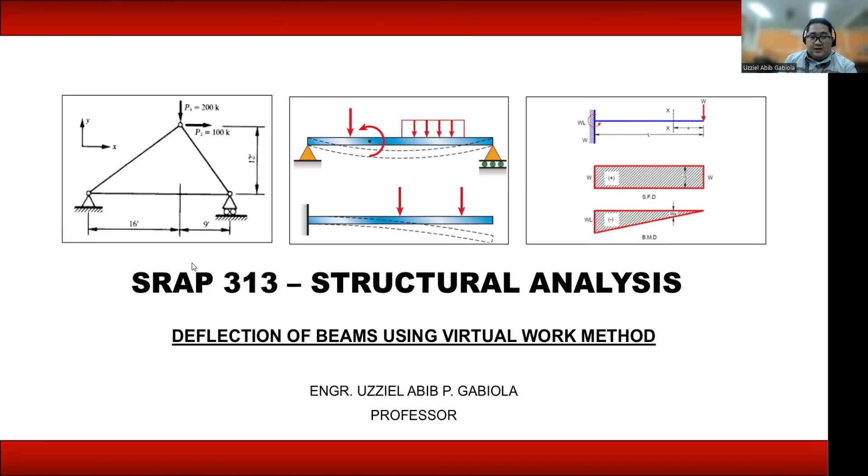For virtual work, I will not go deep into the derivation on how the formulation came to be, because it will just bore you, and eventually you won't apply it in the solution anyway, since the formula is already established, which is this.

Since we are utilizing the virtual work method or energy method, the conservation of energy still exists, which is that our external work is equal to our internal work.

So the main formula we are concerned with for this method in applying the virtual work method for beams is this. As you can see, it is the same when we are looking for the deflection or displacement of our point. The formula is given as the integral of MX, capital M times small m, over EI dx, and for slope it is the same.

So that is the beauty of this method. You are using the same formula, you will only differ in the applied virtual load.

Because if we are talking about displacement, we are talking about translation with respect to our x and y axis. So our consideration is a load, whether applied up or down, at the point we are interested in.

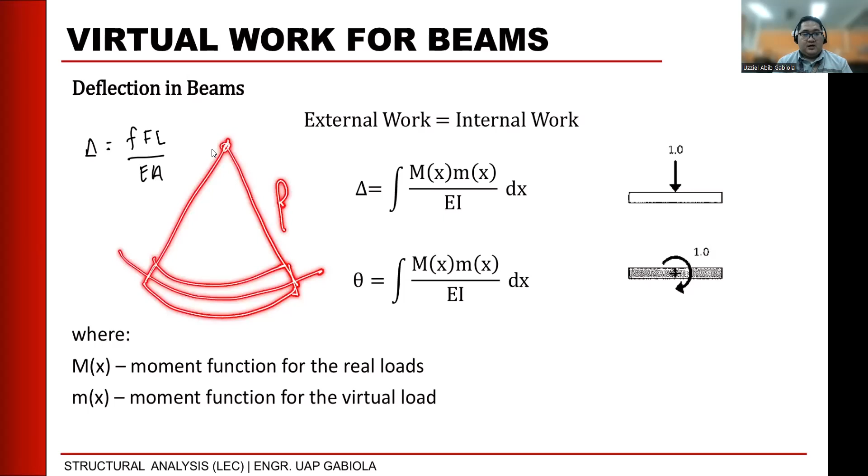That discussion arrives at the equation where the differential equation is the second derivative of displacement equals M over EI. This is the value we get from it.

Here is what happens, this is the curvature equation. If we integrate it once, we get dv over dx. This is the same as in the double integration method, where we integrate over the length L.

So we get ML over EI. This dv over dx is our slope in the double integration method. And if we integrate once more, it becomes v, which is our deflection, giving us ML squared over EI, equal to our deformation.

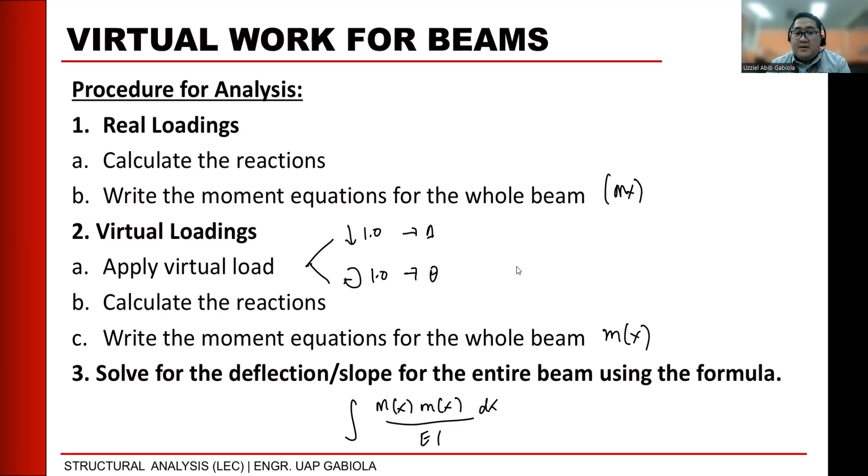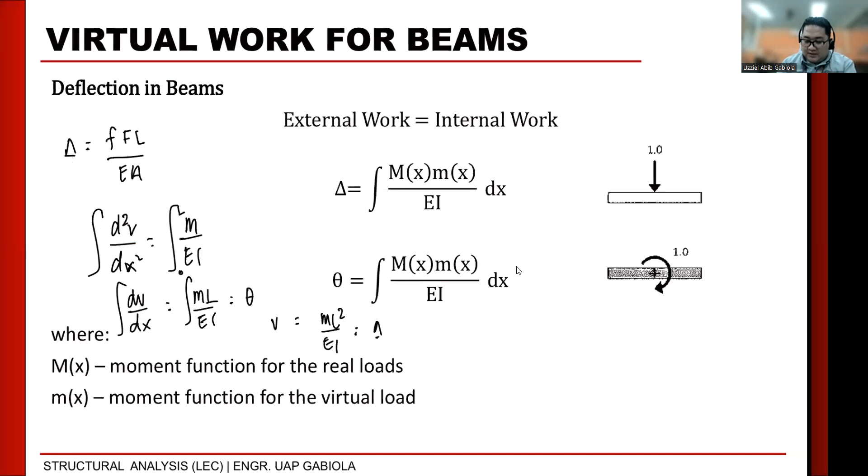Before we go to the example, let's show how the units work. For example, for theta: according to the previous slide, theta becomes ML over EI.

The moment is usually in kilonewton meter, the length usually in meter, E is in gigapascal - like we used before, kilonewton per mm squared - and the inertia is in mm to the fourth. You'll notice the kilonewton cancels, and the two mm squared cancel, leaving meter squared on top.

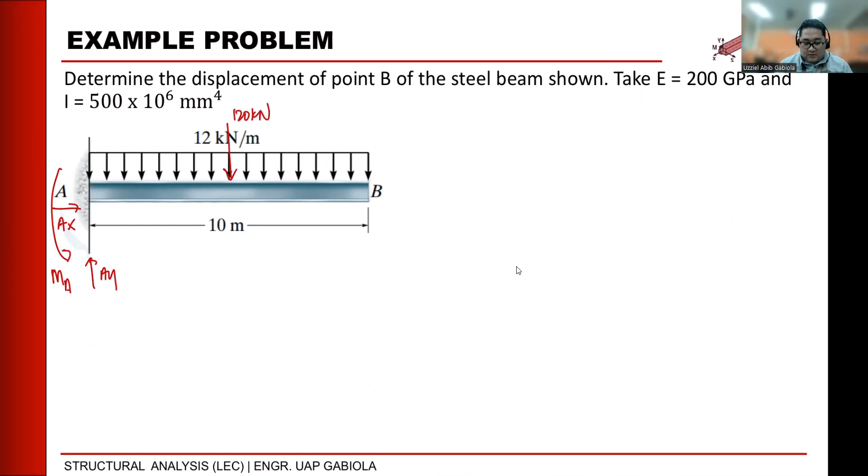We have a uniformly distributed load, and we know that it acts on the center of the beam. So 12 times 10 gives us 120 kilonewton. Solving, AY becomes 120 kilonewton, and AX will be 0.

For MA, we take the summation of moment at A, taking counterclockwise as positive. So 120 times 5 equals MA, or MA equals 120 times 5, which is 600. Okay, let's pause here for a while.

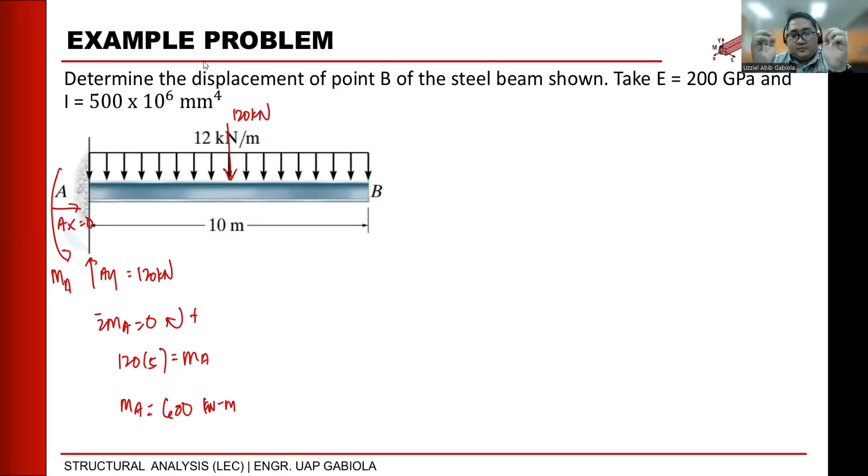Okay, so this is our moment, 600 kilonewton meter. So these are our support reactions, complete na. Next job natin is to identify our moment equation. Kailangan strategic tayo sa pag-identify kung alin yung magiging origin natin.

So kung kayo yung papipiliin, tapos papahanapin kayo ng moment equation, which side yung i-consider ninyo? Okay, halimbawa naglagay ka ng cut. Since uniform lang naman yung load natin, safe to assume na one section lang yung kailangan natin. So pag nag-cut ka ng section, aling side yung i-consider mo? Ang mas convenient, syempre, yung right side.

Kasi lesser ang loadings natin, uniformly distributed load lang. Pag yung left side, meron kang mga forces na to, so medyo magiging tedious yung paggawa mo ng moment equation kapag yung left side yung ginamit mo. So pwede natin gamitin yung right side, okay?

Ngayon, ang kaibahan, pag consider mo yung right side, pwedeng doon muna gawin yung reference ng x mo. Ibig sabihin, pwedeng ito yung maging positive yung origin mo. So ito ang zero mo, yung point B ang zero mo, and then magiging from there yung mismong value ng x mo, habang nag-a-adjust ka doon.

So pag nag-cut ka ng section, okay, ito ngayon yung magiging beam natin. And then this is x. Di ba dati ang ginagawa natin, pag sa right side, magiging siyang 10 minus x?

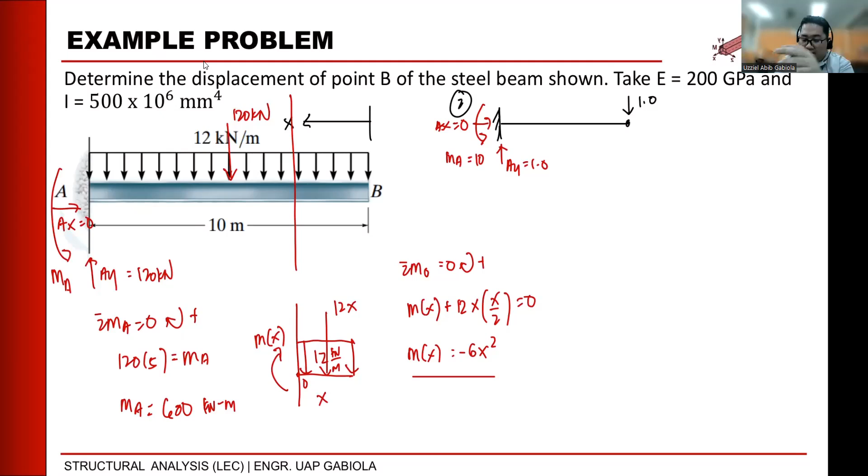Okay, and then after nga makuha na natin support reaction, isusulat na ulit natin yung moment equation for the whole beam. Pero ang kailangan natin gawin, kung anong ginawa nating procedure doon sa real load, ganun din yung gagawin natin doon sa kabila. What do I mean? Dito, kailangan mo na ng moment equation. Pag nag-cut ka ng section, kung doon sa real load right side yung kinonsider mo, dito sa virtual load, right side din ang i-consider mo. Or kung ginawa mong origin itong free end natin, dun pa rin yung magiging origin natin.

Para later pag nag-substitute tayo ng values doon sa integral equation natin, hindi tayo magkakaroon ng dalawang unknown na variable. Same variable lang yung gagamitin natin. Okay, so dito, again, taking a cut.

Cut doon sa section natin na yon. So mangyayari, ito yung magiging cut section natin. This is 1.0, so same cut tayo, so x lang din yan. Kailangan natin is yung small moment na x.

So, pag summation of moment at point O is equals to 0, taking clockwise as positive, so we have mx plus 1 times x is equals to 0, or small mx is equals to negative x. Okay, so ito naman yung ating moment equation for our virtual load.

Okay, next, punta na tayo sa third step natin, which is yung gagamitin na natin yung formula is equals to mx, small mx, dx over EI.

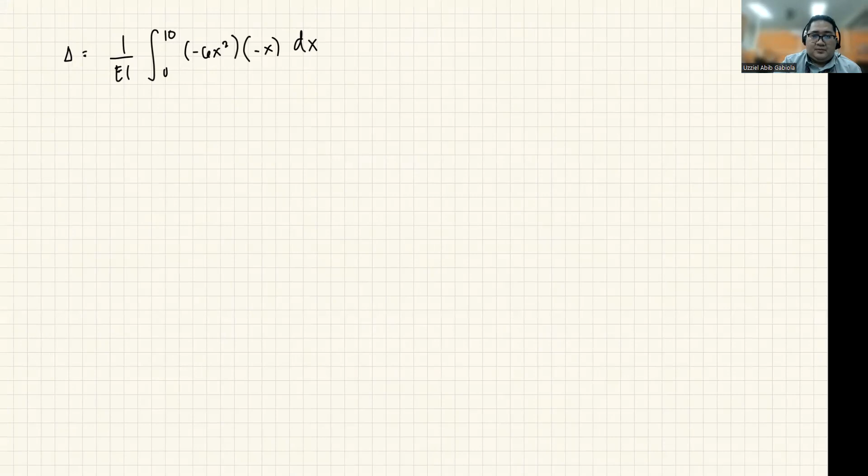Share natin yung calculator. Okay, so ito yung calculator natin. So integral sign natin, type lang natin negative 0.6 x squared times negative x, from 0 to 10. Equals. Yan, may nakuha tayong value, 1,500.

Okay, so yung 1,500, di ba EI yun? Yung E natin, pakita ko na lang muna dito sa calculator. Ang E natin is 200, at yung I natin is 500 times 10 to the 6. Tapos para uniform ang units, ang ginawa natin, yung ating nasa taas, minumultiply natin ng 1,000 cube. Okay, para sa displacement, so yung magiging answer is 15 mm.

So yun yung magiging deflection natin, 15 mm. Okay, so okay ba tayo doon?

Sige, balik tayo doon sa slide. Kasi straightforward nga siya, no? Pwede mong, kung medyo sanay nga kayo talaga mag-calculate niya, pwedeng sa calculator na yung solution nito, no? This is for board exam naman, ang sinasabi ko, no? Hindi doon sa exam natin.

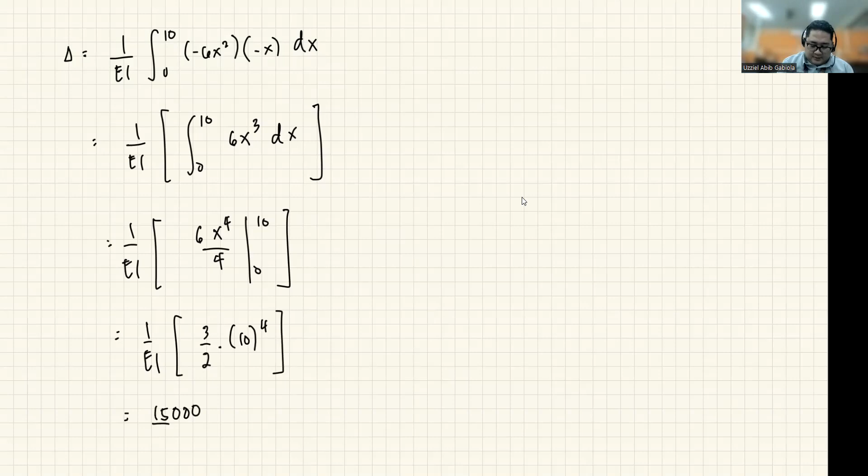Okay, so ayan, so dito kung ima-manual natin, 1 over EI, ito magiging 0 to 10, multiply that is 6x cubed dx. Okay, so 1 over EI, so magiging siyang 6x to the 4th over 4, and then 0 to 10, that will be 1 over EI. 6 over 4 is 3 halves times 10 raised to 4. Okay, so that is just 1.5 times 15,000 rather. So 15,000, okay, over EI.

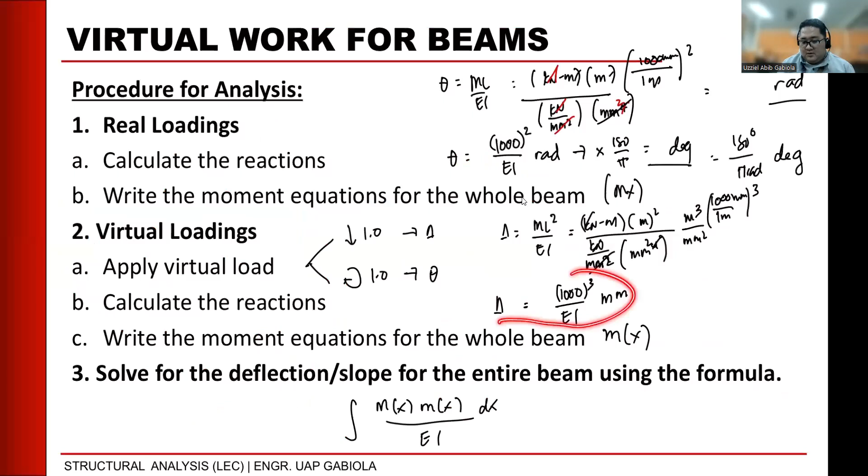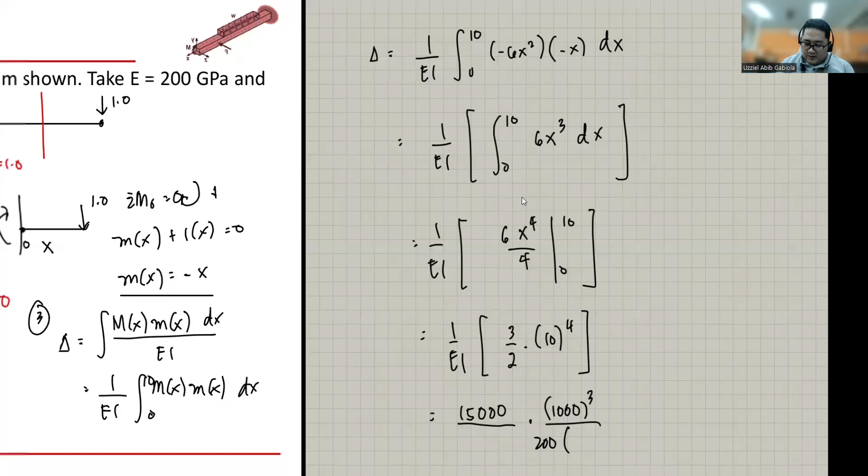Again, yung ginagawa natin kanina dito, no? Pag displacement, multiply natin ng times 1,000 cube over EI. Okay, so yung nakuha natin, so 1,000 cube over EI. So 200 times EI na, ang I natin is 500 times 10 to the 6. Okay, so pag kinalculate natin, 15,000 times 1,000 cube over 200 times 500 times 10 to the 6 should be 150 pala, no? 150 mm.

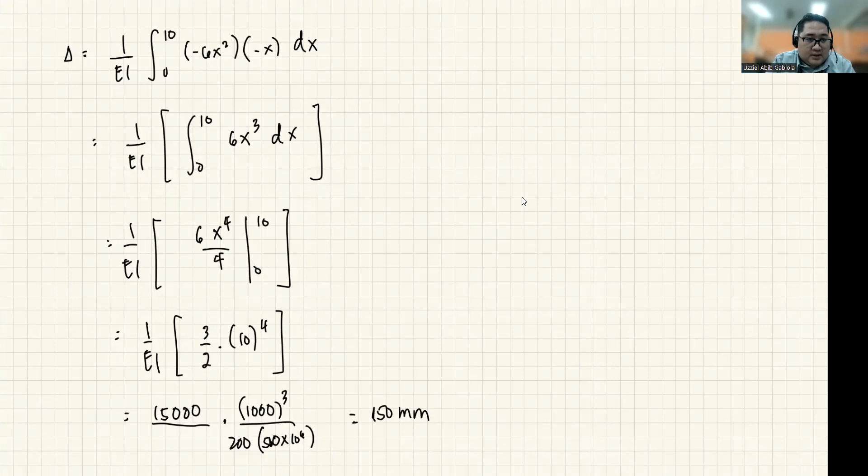Okay, so doon sa calculator ko kanina, yung limit siguro, no? Mali yung napindot kong limit. 0 to 10 points, 6 pala, no? 6x squared. Hindi, share ko lang ulit, ha?

Okay, dito. Ayan, dapat pala ang equation pala natin is 6x, ano? Bakit ba naging 0.6 to? Ayan, ayan, yan, para 15,000 yung lalabas, tapos times 1,000 cube over EI.

So 200 times 500 times 10 to the 6. Ayan, so 150 mm, that will be yung displacement at point B. Yan na yung answer natin for this first example.

Okay, so 'di ba, in a nutshell, mas mabilis siya, no? Madali siyang i-calculate, mas madaling makuha yung deflection natin. Okay, so that is for our first example. Okay, so for a while lang.

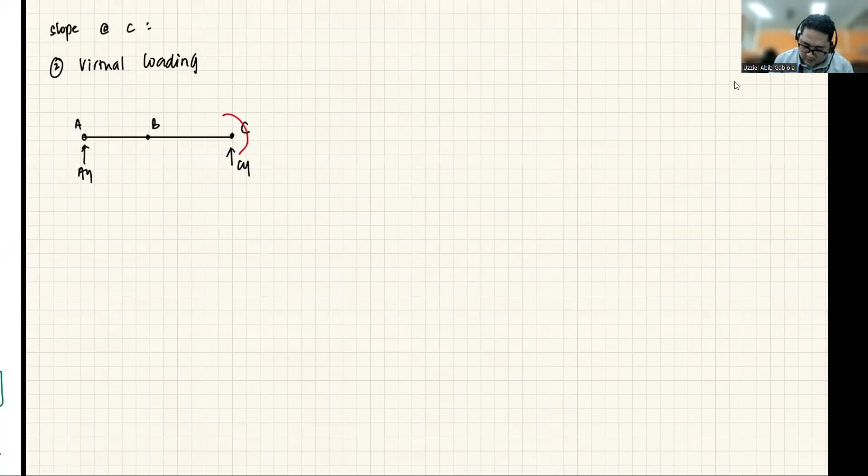Then we get the support reaction. Summation of moment at C equals 0, taking clockwise as positive. So we have AY times 2 plus 3, which is 5, plus 1 equals 0, or AY equals negative 1/5, that is 0.2. Negative means our initial assumption on the direction of AY was wrong.

So AY is 0.2 downward. Then we need to get the value of CY. Summation of forces, y equals 0. So CY equals AY, or taking moment at C: 1 times 3, so over 5, CY is 0.2.

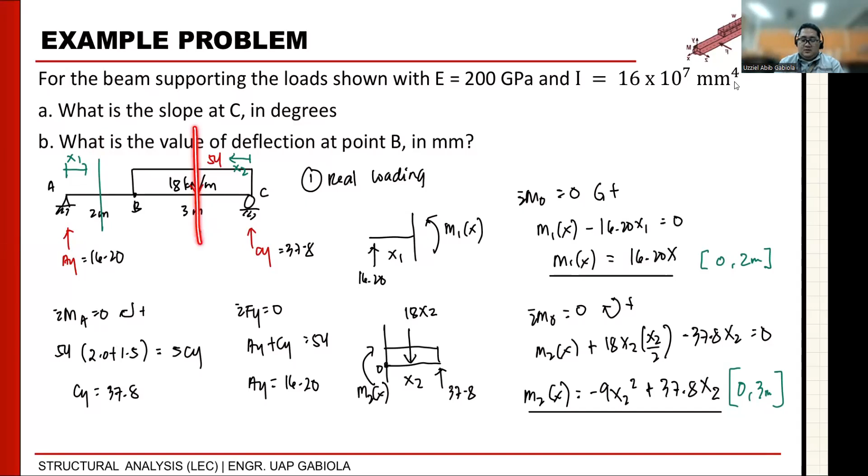So we have 0.2 times x1, and this is our moment, small m1x. Summation of moment at O equals 0, counterclockwise positive. So m1x plus 0.2x equals 0, or m1x equals negative 0.2x. That is our first moment equation.

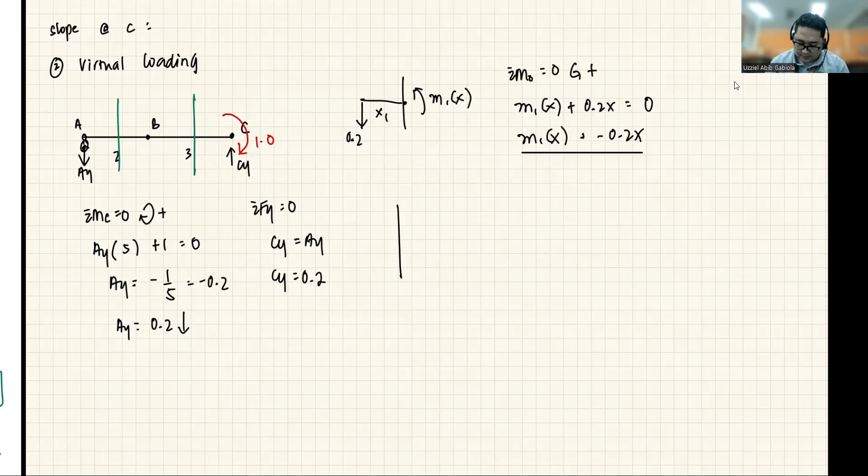Then we have the other one: 0.2, a moment of 1.0, and m2x. Summation of moment at O equals 0, taking clockwise as positive. So m2x plus 1.0 minus 0.2 times x2, our distance, equals 0, or m2x equals 0.2x2 minus 1.0. That is our second moment equation for the virtual load.

Now let's continue to step 3 and put it into our equation. To get the slope at C, we need an integral for M1x times m1x, the first segment - EI factored out since it's the same - from 0 to 2, plus the integral of M2x times m2x dx from 0 to 3.

Substituting: 1 over EI, with parentheses, M1x is 16.2x, so that is 16.2x times negative 0.2x from 0 to 2 dx, plus from 0 to 3: negative 9x squared plus 37.8x2, and 0.2x2 minus 1.0 dx.

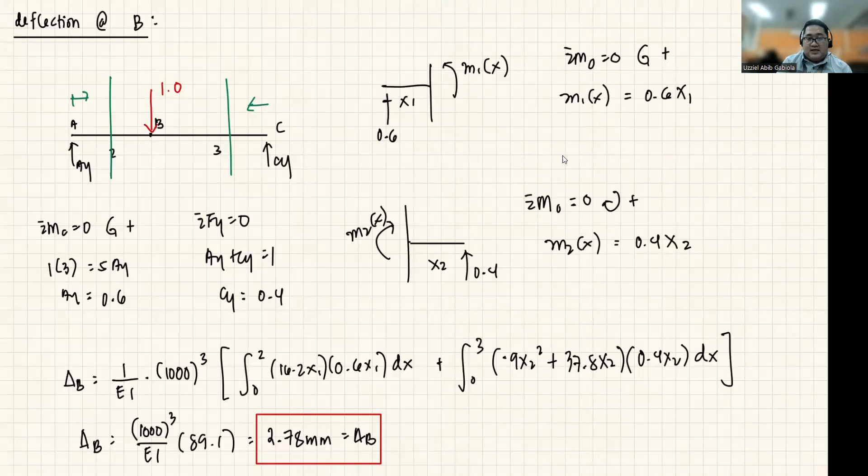Pero at least ito, parang double integration method din siya dahil kinukuha natin yung moment equations, pero diretso na sa calculus yung pag ano sa kanya.

Okay, ito yung second example natin. Kaya pa ba ng isa? Sige, let's try another one.

From the given beam below with constant value of EI, yung unit niya, 63,000 kilonewton meter squared. Compute the deflection at free end, determine the slope at the free end in radian, and slope at A in radian. Okay? Yung beam natin is a simply supported beam. Meron tayo ditong hinge, meron tayong roller, and then we have a uniformly distributed load na 20 kilonewton per meter.

So ayan. This is 15 meters. This is 6 meters.

Okay, so to solve, again, support reactions tayo. Bigyan natin ng points. This is A, B, and C. So AY, then BY, and then yung ating ECL, that is 20 times 21, that is 420. So pwedeng summation of moment at A is equals to 0, taking clockwise as positive.

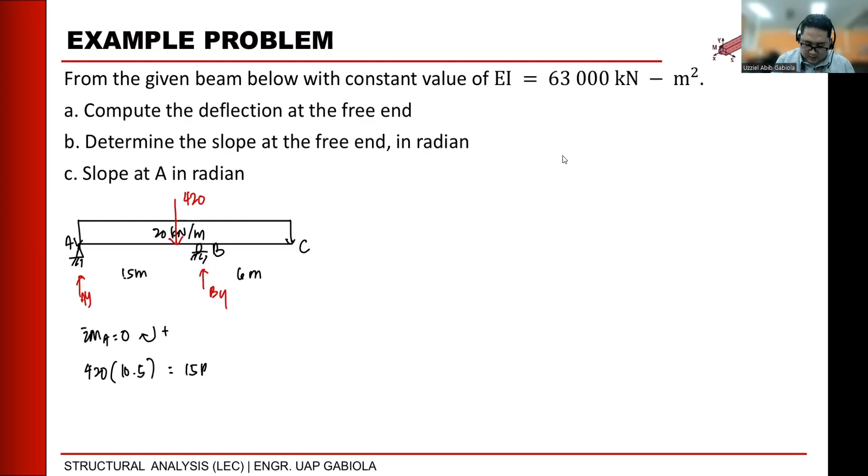420 times kalahati ng 21, 10.5, is equals to 15 BY. So BY is equals to 420 times 10.5 over 15, that is 294 kilonewton.

And yung BY, so ang AY, AY plus BY is equals to 420. So AY, 420 minus 294, that is 126 kilonewton.

Okay, so looking at our beam, ilang segment, ilang equation ang ikukunin natin. Yung pagtingin ulit, halimbawa parang tinatakpan niyo yung beam, ano? So mula dito sa left side, titingnan mo habang nagka-cut ka ng section, hindi nagbabago yung condition nito, no? Ibig sabihin, pwede mong i-represent yung isang segment na to.

Bawa, itong cut na to, hindi siya nagbago. Dito sa cut na to, hindi siya nagbago. ECL to ha, wag kayo malito dito, ECL yan, yan ay para lang makuha yung reaction. Hanggang dito sa point na to, wala siyang pagbabago. So we can represent itong isang side natin as one equation, so isang segment tayo doon.

Okay, at yung isa, pwede dito. Dito sa segment na to, alin ang consider mo, yung left o yung right? Pag tinignan mo yung left side, meron kang uniformly distributed load, meron kang dalawang dito. So mahirap yon. So yung sa right side, uniformly distributed load lang, so yung right side ang gagamitin mo, pero gagawa ka ng bagong coordinate para sa second one.

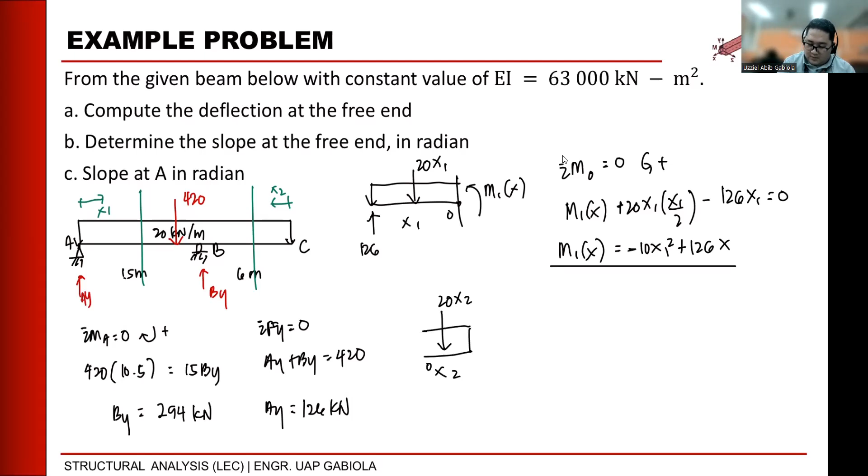Negative to negative, okay. Next is yung other cut natin sa kabila. This is x2, so this will be 20 x2. This is our point O, so moment 2x. So summation of moment at O is equals to 0, taking clockwise as positive. So m2x plus 20 x2 times x2 over 2 is equals to 0. m2x is equals to negative 10 x2 squared, that is our second equation.

Okay, so ayan na yung ating sa real loadings natin. So pwede na tayong mag-calculate. Una, compute the deflection at the free end. Free end muna tayo, letter A muna tayo.

So ito yung ating beam again. And then meron tayo ditong AY, and then CY dito, BY.

Okay, dito tayo sa C. Dito tayo maglalagay ng displacement na hinahanap natin, deflection o displacement. So, 1.0 dito. This is 15, this is 6. Summation of moment at A is equals to 0.

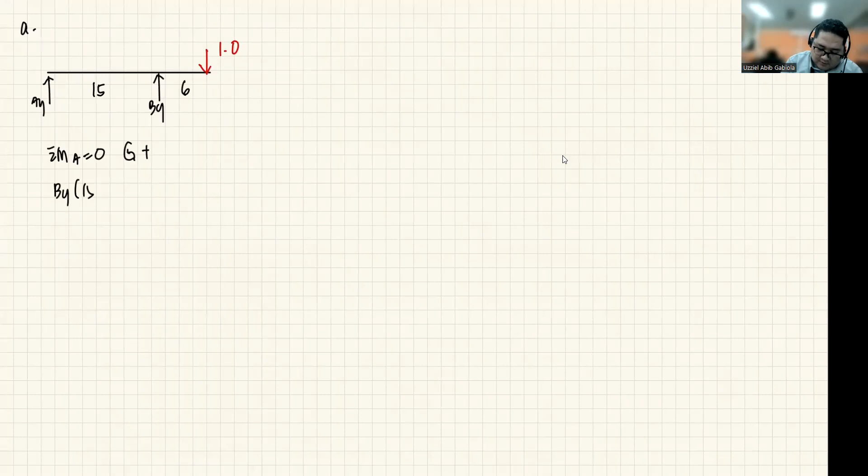Taking clockwise as positive, counterclockwise, by times 15 is equals to 1 times 21. Or by is equals to 21 over 15, that is 7 over 5 or 1.4. Kung 1.4 yung by, summation of fy is equals to 0, so ay plus by is equals to 1.0. Yung ay natin will be negative 0.4.

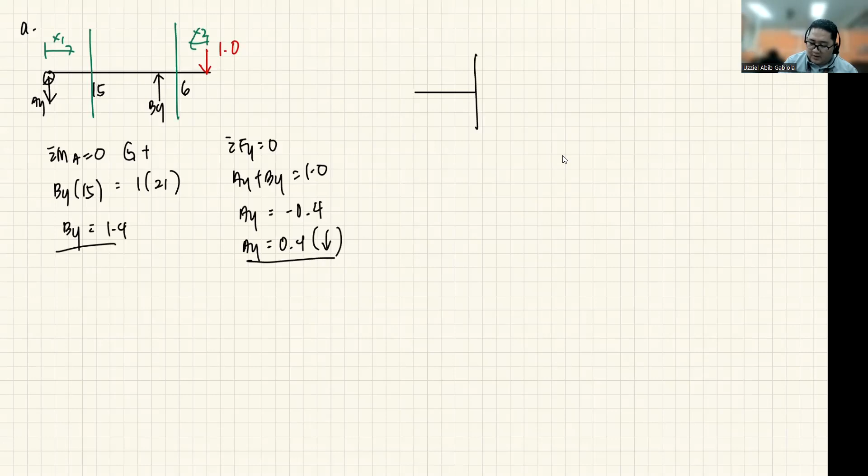Dapat ay is 0.4 downwards, para maging equal. Then kunin natin yung cut. Yung first cut natin mula dito, that is our x1. Second cut natin, this is our x sub 2. Okay, so ito yung ating segment. This is our load, 0.4, x sub 1.

And then this is our M1X. Summation of moment at O is equals to 0, counterclockwise as positive. M1X plus 0.4 x sub 1 is equals to 0, or M1X is equals to negative 0.4 x sub 1. This is our first equation para dun sa virtual natin.

And then next is ito, this is yung 1.0 and then x sub 2 to M2X. Summation of moment at O is equals to 0, taking clockwise as positive. So M2X plus 1.0 x sub 2 is equals to 0, or M2X is equals to negative x sub 2. So ito yung ating second moment equation.

Okay, and then combine lang ulit. Yung step 3 natin, combine lang natin. So, deflection at C is equals to 1 over EI. So ano yung magiging segment natin? Yung first segment natin is applicable from dito sa 0 na origin hanggang 15, 0 to 15.

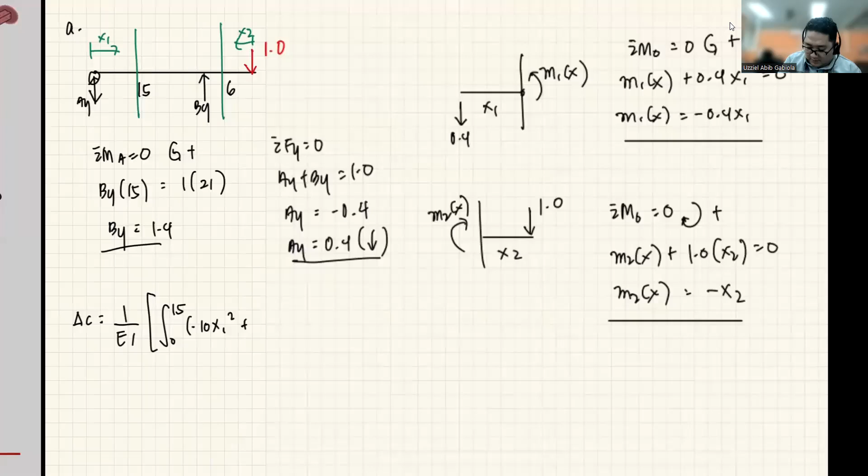Okay, so input na natin yung M1X natin na original. So ito, negative 10x1 squared, plus 126x1. Multiplied by yung M1x na maliit. So ito yun.

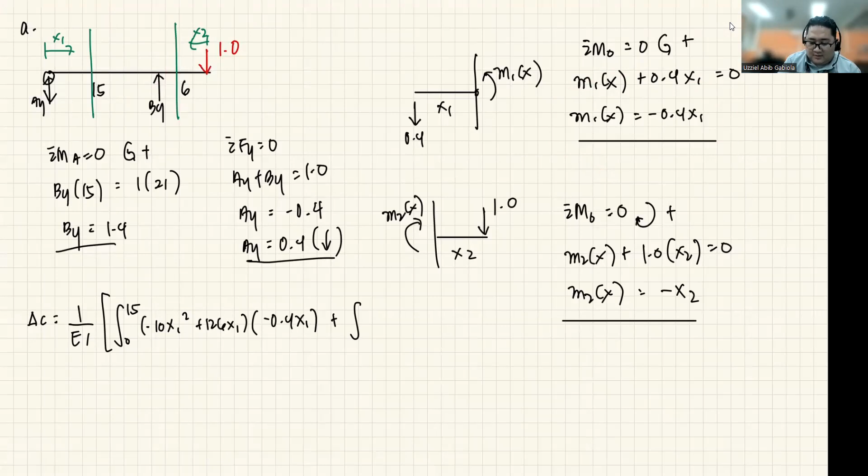Plus, yung kasunod nating segment, ito yun. Applicable siya from dito sa position na to hanggang dito. Yung kabila, yung first segment, ito yung nakuha. Yung kabila ay ito, so magiging limits niya is 0 to 6. And then, that is negative 10x squared multiplied by negative x2 dx. So 1 over EI.

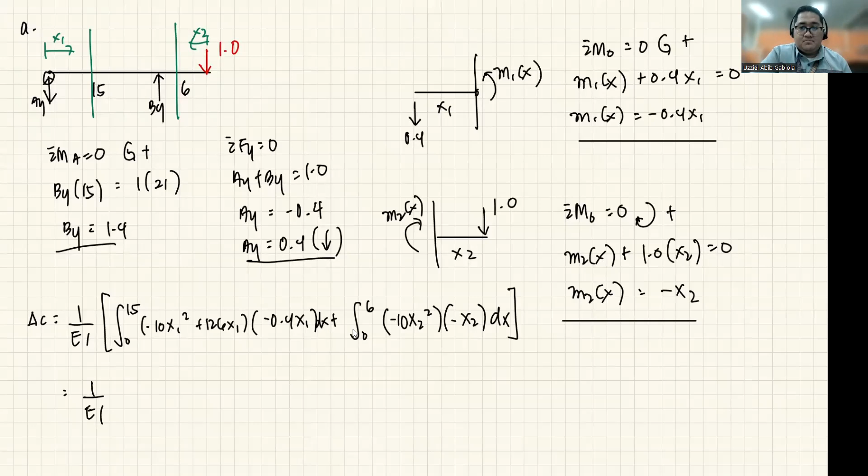Then punta tayo sa calculator ulit. Okay, ito yung calculator natin. Again, dalawang integral. So, we have negative 10 x squared plus 126 x, times negative 0.4 x, from 0 to 15.

Tapos saan natin siya multiply? Yung unit natin sa EI, given ay EI, kilonewton meter squared siya, so naka-meter squared siya. Hindi natin kailangan i-convert katulad nung kanina na minumultiply natin ng 1,000 cube, kasi naka kilonewton meter squared yung unit natin sa ilalim. Ang mangyayari lang ngayon is itong value na to, i-divide na natin siya directly dun sa EI natin na 63,000.